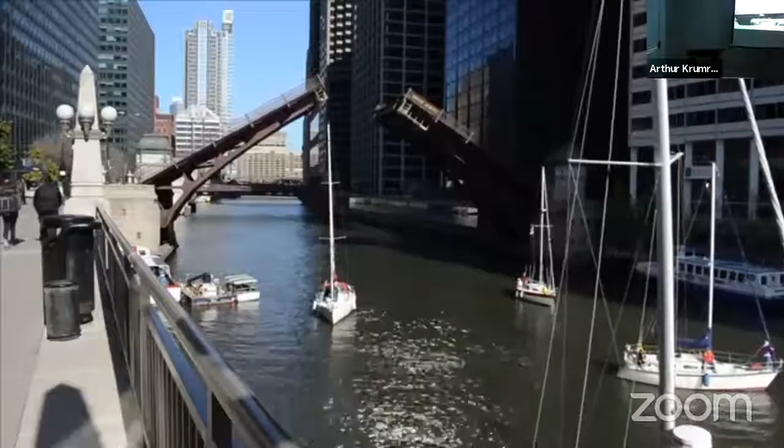Today, Chicago is known for its elevated trains and downtown Loop, Mercantile Exchange and Financial District, the blues, wonderful architecture, cold winters, great food, and sports teams. Knifing through it all is the Chicago River, parsing the busy city into its north, west, and south sides. It is the river that has essentially defined and created Chicago. Besides being the Windy City or Second City, Chicago is also the drawbridge capital of the world. No doubt Amsterdam, Pittsburgh, and Venice have more bridges, but no other city generated as much innovation, and as many different movable bridge designs as Chicago.

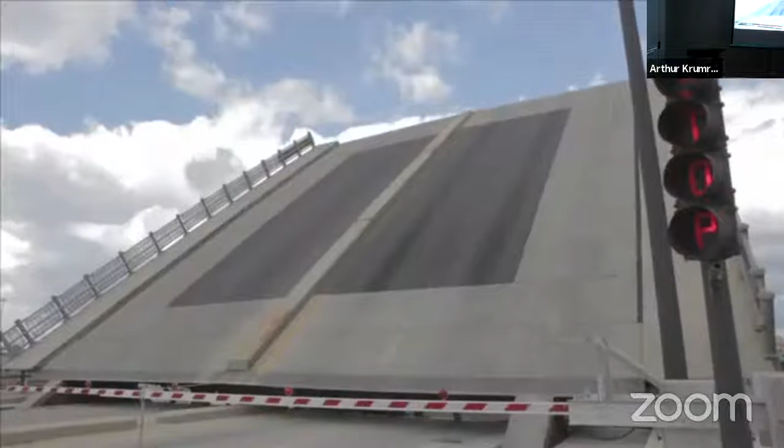My name is Patrick McBriarty, and I used to not care about the bridges. Until one day, a bridge got in my way. Up until about 10 years ago, I was pretty much like everybody else. I didn't think much or give any real consideration to the bridges here in Chicago. They were just there and one way to get from point A to point B. As a kid, we moved around a few times, but then really settled in Youngstown, Ohio. And Youngstown, while I was growing up, was a big steel town.

I was visiting Chicago and met my wife through some friends sailing, and then got married in 1995. Very happily married for about 5 years, and then in November of 1999, she died suddenly, and that completely blows your world apart, and you end up trying to figure out who you are, what do you want to do, and what drives you again. I picked up a camera. I'd done some photography in high school and had enjoyed that, so I ended up going to Kinzie Street and really kind of saw the bridges as more than just simple structures. I mean, there's steel here, there's this gritty aesthetic that kind of drew me in, and now I can't look at a bridge the same way.

When I was first researching the bridges, I found out Chicago was the drawbridge capital of the world, and that just really seemed to hook me, and from there the journey began. Soon after, I found out that today's bridges are called Chicago-type bascules. These bridges were designed by City of Chicago engineers around the turn of the last century. The term bascule is a French word meaning seesaw, suggesting heaviness and balance. The centuries-old bascule principle was commonly used on castle drawbridges.

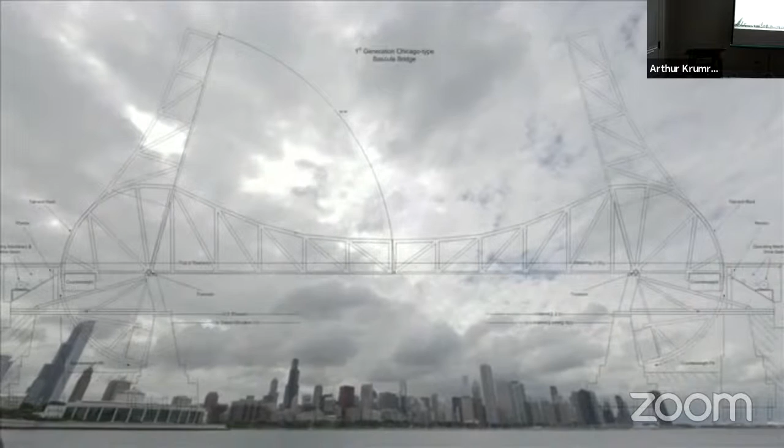Led by city engineer John Ericson, these bridges were developed specifically for the Chicago River. Based on the Tower Bridge in London, the world's most recognized bascule bridge. The Chicago-type drawbridge is also internationally recognized and has been used all over the world.

I had conflicting answers on where the first bridge in Chicago was. And once I dug into that, it revealed a very interesting story about Chicago's earliest beginnings. It was here in 1829 that Archibald Caldwell built the first ferry, and it was just a line strung across the North Branch with a canoe on either side. Locals referred to it as the Grapevine Ferry.

He was running Wentworth's Tavern, which was here on Wolf Point, and competing for the business of the small village and military outpost. Opposite him was his competitor, Samuel Miller, who ran Miller's Tavern. Miller decided to one-up things and built a footbridge on the North Branch just back over here by the Kinzie Street Railroad Bridge that stands up in the air today.

Like a lot of the early Chicago bridges, and this was the very first, here on the North Branch of the Chicago River, it was done in self-interest to generate business, and it influenced the local economy to grow the city of Chicago.

Oh, thanks, Steve. Sure.

Now, building a bridge to get to a tavern makes a lot of sense to me. It'd be a great improvement over trying to climb into a canoe and cross the river, particularly after a few drinks. So whether it's a hot, steamy Chicago day or in the dead of winter, a bridge connecting patrons to a tavern is a great business idea. So here's to Samuel Miller. He built the first in a long line of Chicago River bridges. To Samuel Miller.

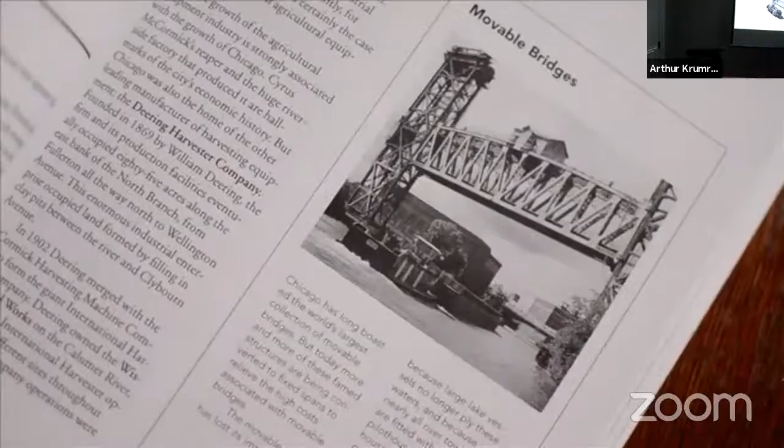While researching the history of Chicago River bridges, a man named David Solzman kept coming up. David is a well-known geographer and professor and author of a book on the Chicago River. Behind the story of these remarkable bridges is the story of a vital river. Hello, I'm David Solzman. I spent quite a bit of time musing about the river and the bridges and all of the other things that go with the river.

I remember being in China. I was on a river cruise to the mouth of the Yangtze. I met a fellow from Japan who was an engineer, and he asked me what I did, and I told him I'd written a book on the Chicago River, and he said, "Is it a big river?" I said, "No, it's very small, 30 some odd miles, depends how you measure it." He said, "Well, why are you so interested? Here's the Yangtze, this great, long, huge river."

And I had to say to him, as I would say to anyone, a lot depends upon where the river is. And this river was a key to understanding the origin and growth of the city here, and for that matter, this whole western expansion, because what happened in Chicago turned the rail network 90 degrees. Traffic and commerce had gone up and down the Mississippi, north and south. But after Chicago got rolling and established a portage on this little river, suddenly the railroads came in and started traffic moving east and west.

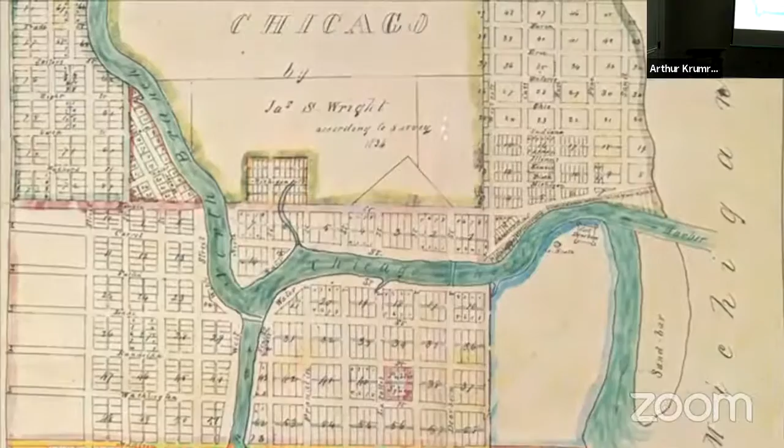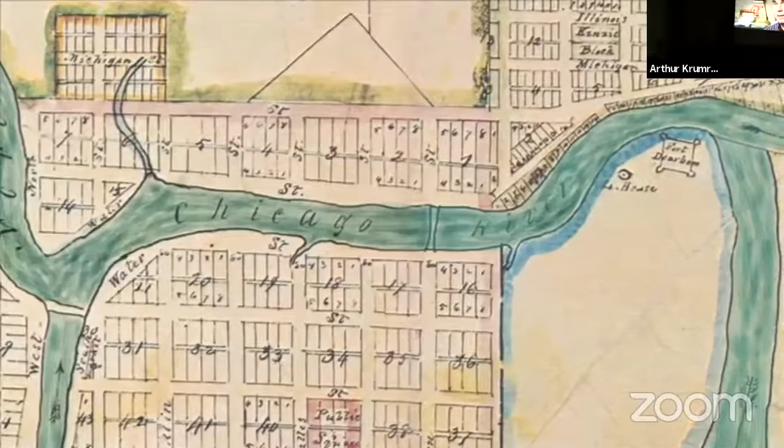So this commercial and political battle between North and South Siders led to an impasse in the Common Council that was finally broken when William Ogden, the city's first mayor, and Walter Newberry, a North Side merchant, donated 2 city blocks to Catholic authorities. And those city blocks are where Holy Name Cathedral stands today. The deadlock was broken and the Common Council voted for the first Clark Street Bridge, which would be the city's 4th bridge and the 2nd drawbridge, and connected the north and south sides of the city.

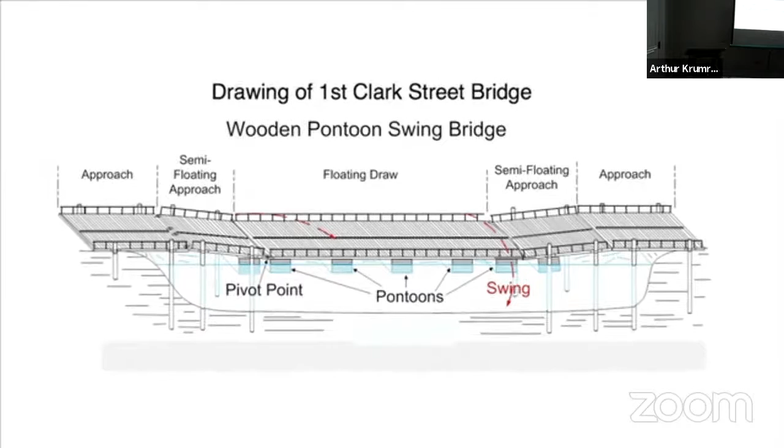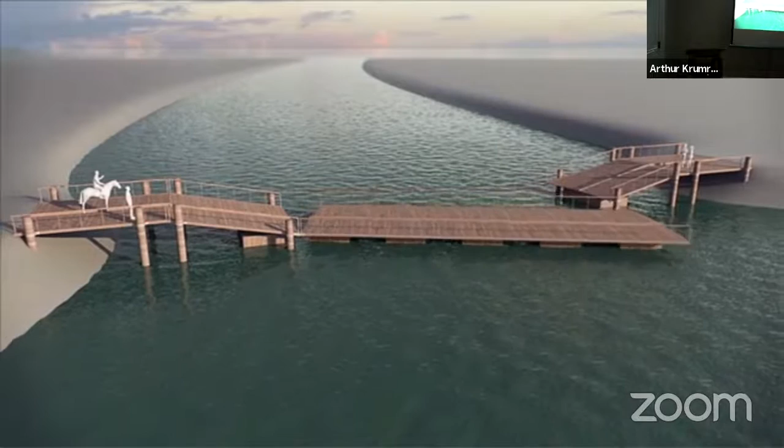One of the things that they try is building a pontoon, just a hollow wooden box, probably sealed with pitch or tar to make it watertight, and floating one end of the bridge on that and having the other end on shore with a pivot so that it can just kind of pull back from across the channel and allow the ship to go past.

Pontoon bridges only last a decade or 15 years in Chicago, but they are still useful in a lot of places in the world where the water is too deep to actually put down piers. And so there are modern pontoon bridges that cross Lake Washington east of Seattle. So the city had built perhaps a dozen of these floating pontoon bridges. And then occurred one of those remarkable disasters that we seem to have in Chicago. We never seem to have any simple disasters.

In the spring of 1849, a rainy spring arrives along with the spring thaw, and a flood starts making its way downriver. Of course, back then, the Chicago River still flowed into Lake Michigan. And so big chunks of ice start getting carried downstream, and they can see the disaster coming. In fact, they can hear it coming because these big chunks of ice are breaking up, sounds like cannon shot in the distance, and the ice is pushing before it the water, which is pushing up the ice, and then

this starts meeting the bridges and carrying the bridges downstream in front of it, and so they can hear it coming. They can sail a few of the boats out into the lake to safety, but there's just not time to get the others.

The Illinois and Michigan Canal opened in 1848. It allowed shipping from the Great Lakes through Chicago to the Mississippi River and the Gulf of Mexico. Soon followed by the development of the railroads, Chicago became a major transportation hub and the nation's transshipment and warehouse center.

Chicago's population grew from 4,000 residents in 1837 to well over 90,000 by 1857. As the young city became a mecca for commerce, more substantial and reliable bridging solutions were needed to support the rapidly growing city.

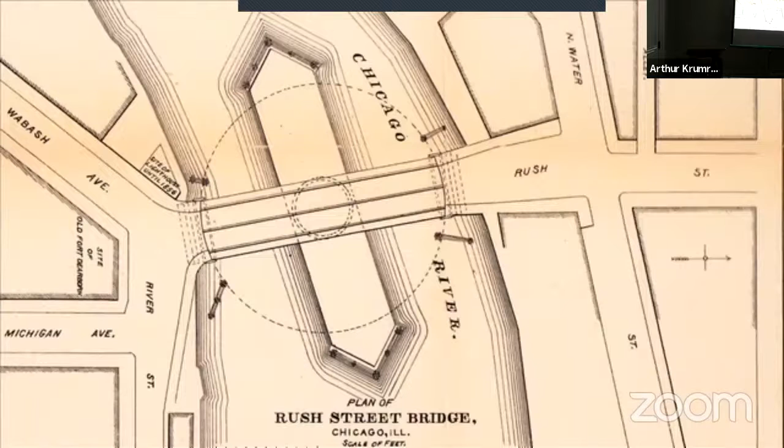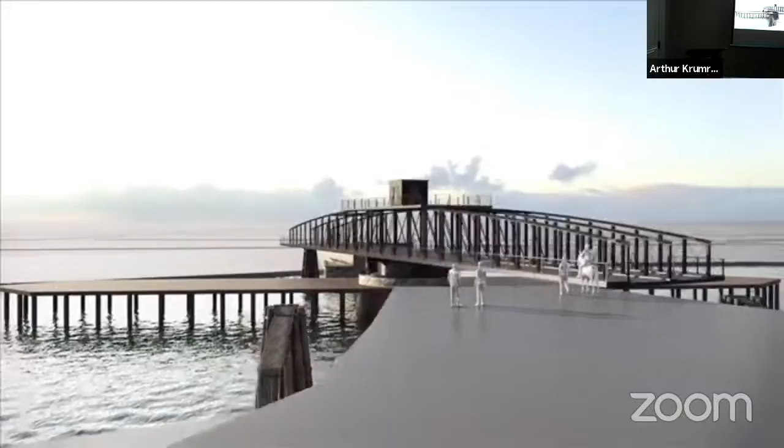The pivot, or swing bridge, was the next movable design tried on the Chicago River. The weight of the bridge was concentrated on the center pivot. These bridges operated like a lazy Susan, as the bridge turntable contained the center pivot and a circle of friction rollers within. This bridge would prove to be the dominant movable bridge solution in Chicago and for the nation over the next 40 years. They required less maintenance than pontoon bridges and permitted passage of small boats underneath.

The bridge tenders typically operated the pivot and swing bridges by placing an angular iron bar, or key, 4 to 6 feet long, into a fitting at the center of the bridge deck. By repeatedly walking the key around in a circle, the reducing gears and turntable rotated the bridge to open and close it. On a hot day, with the busy ship traffic, a bridge tender really earned his money, which in 1858 was $60 to $150 a month, depending on the bridge.

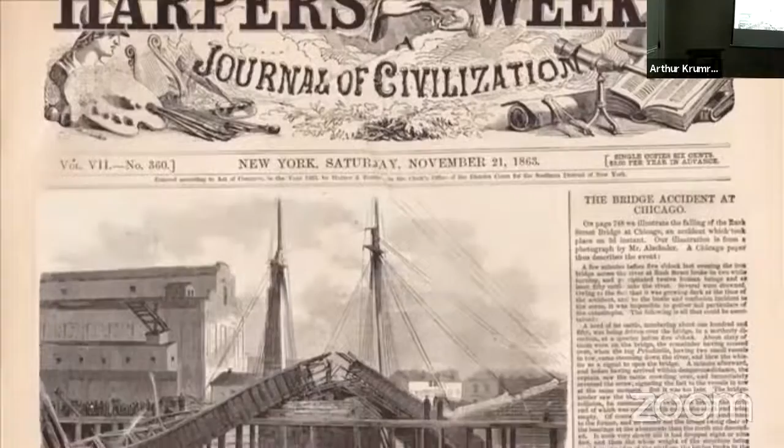For a time, appointed by the mayor, this became a political patronage job, and bridge tenders were bonded against negligence and granted police powers on the bridge and for the immediate vicinity. So one of the most dramatic bridge disasters occurred in 1863. It was at the Rush Street Bridge in November on Election Day, when the main bridge tender was away for the Copperhead Party peddling tickets at the polls.

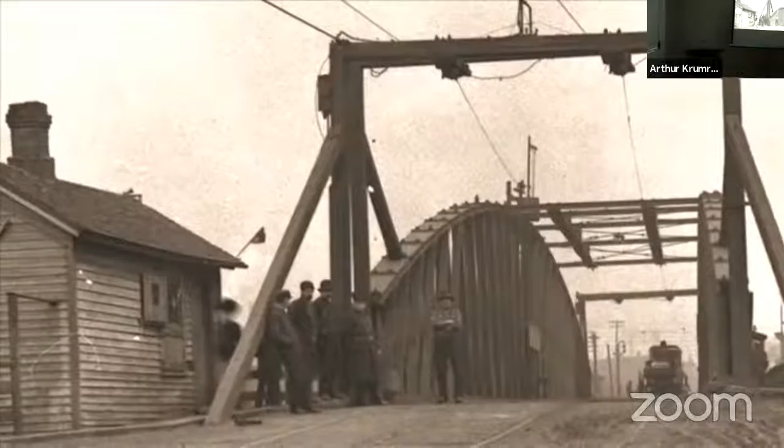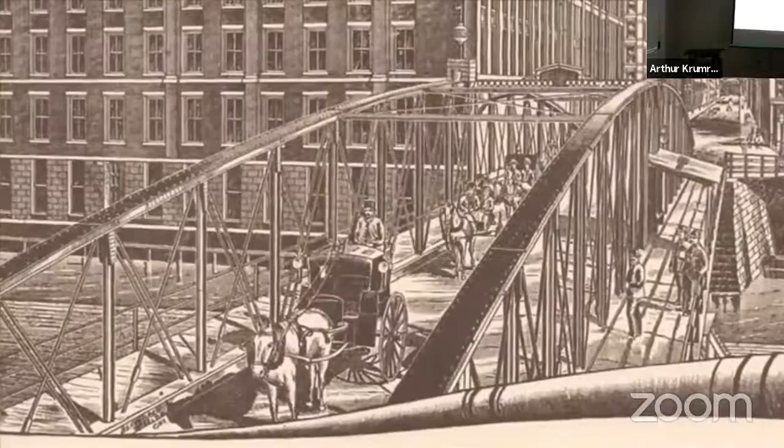He had gotten a substitute, and the substitute bridge tender, which accounts described as an ignorant Irishman, did fine most of the day until about 5 o'clock. There was a herd of cattle being driven across the bridge from the south side to the north side. There was also on board the bridge at that point a buggy and wagon, and there was a woman with 2 children on the bridge and a few other men.

Well, a tug was coming and tooted for the bridges to open. People on board the bridge saw what was going to happen, yelled at the bridge tender not to open the bridge, but he proceeded anyway. He and his assistant started to turn the bridge, and as it turned, there was still about 60 cattle on the north end of the bridge.

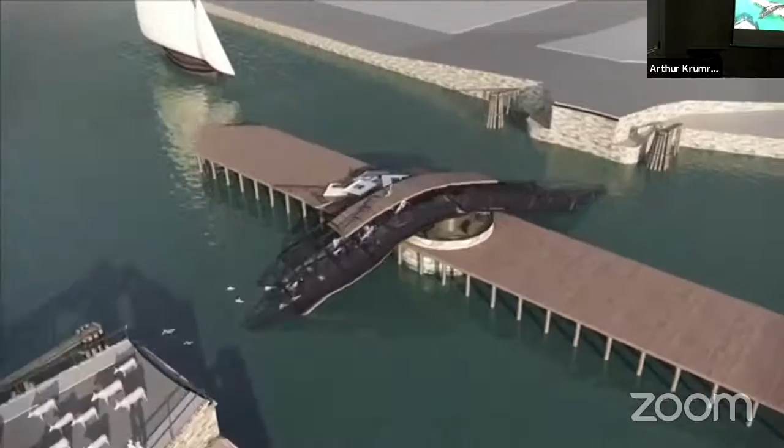And as it rotated away from the abutment where it was resting, then it started to drop slowly as it rotated further into the river. And then suddenly, the south end of the bridge was elevated high up into the air. There were loud reports of cracking of steel and wooden beams as the bridge just collapsed, a total ruin, throwing the cattle and the people and the wagons into the river to swim for their lives.

The disaster was so great, the Copperhead mayor, Mayor Sherman, had a new contract for another Rush Street Bridge out within 2 weeks, and 4 months later, a completely new bridge was built and opened to traffic. The robust swing bridge design offered greater stability and construction of longer, wider, and heavier spans. Better bridges were demanded to convey the ever greater traffic of the rapidly changing city as it doubled and tripled in size. And yet, another Chicago disaster was just around the corner.

So everybody knows about the Great Chicago Fire. And what I wanted to know was, how did that affect the bridges? Basically, a fire raged through Chicago. Most of the city center was burned up between October 8th and October 10th in 1871. The fire raged for over 3 days, with acres and acres of destruction and over 100,000 people left homeless.

And at that time, too, Chicago was mostly made of wooden structures, while the bridges were also mostly wood, even while iron was becoming more and more available. The fire then destroyed 8 bridges right in the heart of downtown Chicago.

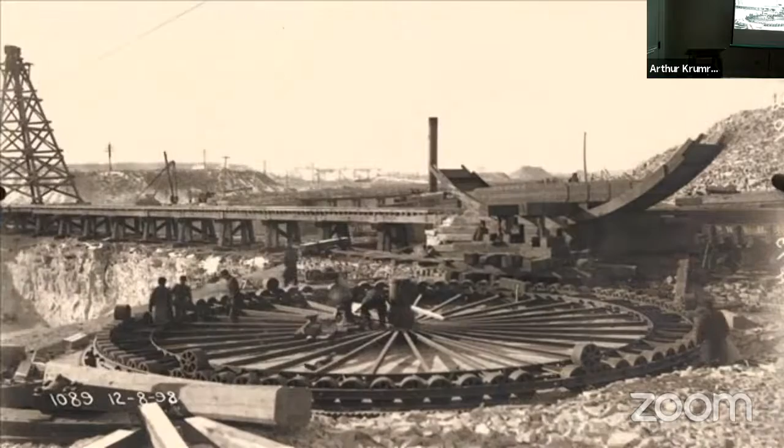Rising from the ashes, Chicago rebuilt and became the busiest port in the world during the 1880s. At its peak in 1887, the Chicago River saw over 21,000 ship arrivals and departures, fueling Chicago's growing industry. The increasing availability of steel brought about larger ships. As a result, no other city in the world experimented with as many different movable, and in particular, bascule bridges as Chicago did between 1890 and 1910.

Prompted by the city's continued development and need to improve national waterways, a new design was demanded to replace the swing bridges, particularly on the Chicago River. The new, bigger steel ships forced removal of the swing bridge center piers, which made navigating important sections of the Chicago River difficult or impossible.

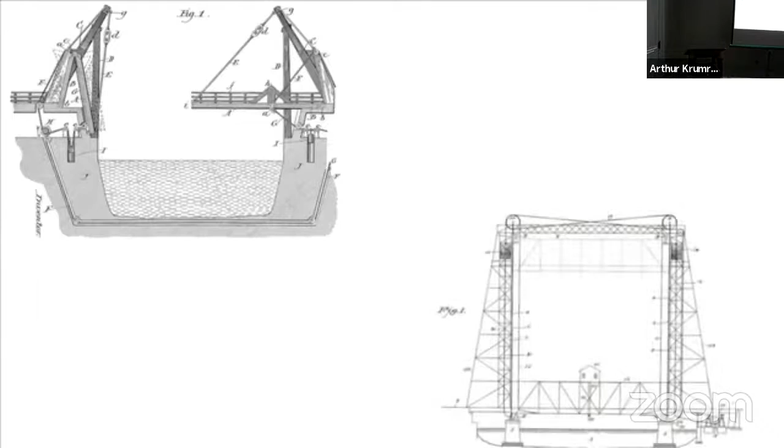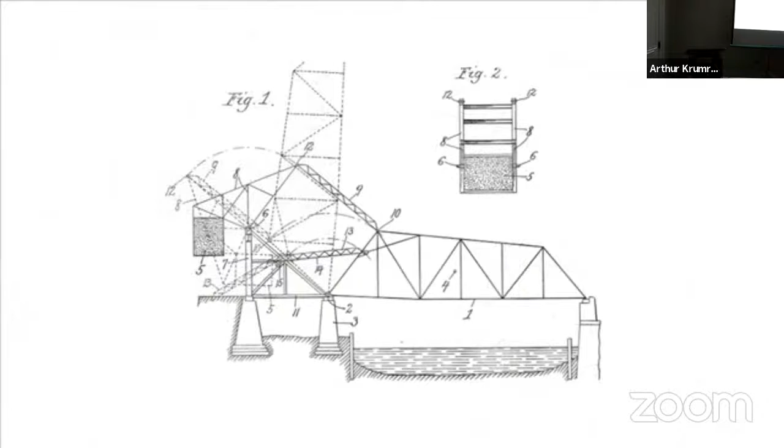With no clear bridging solution, inventors, engineers, and entrepreneurs rushed to solve this emerging infrastructure problem. However, the shortcomings of private sector bridge attempts would eventually push City of Chicago engineers to create their own drawbridge design. Inventors and engineers saw an opportunity to design the next bridge to replace the swing bridge.

The very first experiment the city tried was what was called the folding lift. And this was invented by William Harmon, and it was also called the Harmon Jackknife Bridge. The design was a little too complicated, had too many moving parts, and the city looked for another solution.

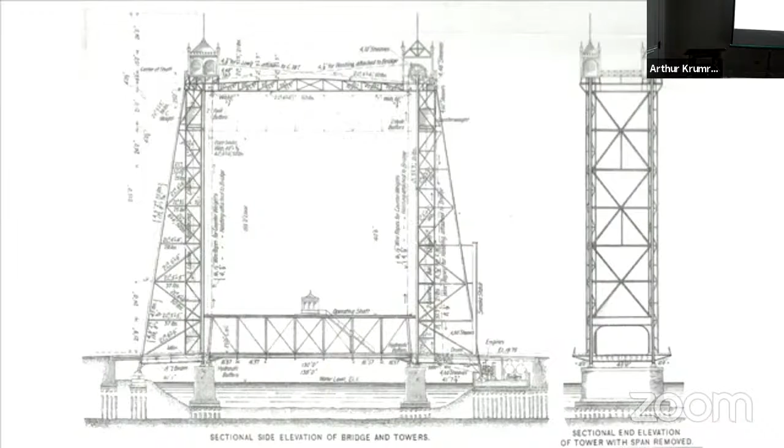The next solution was a vertical lift bridge. This was a bridge designed by J.A.L. Waddell, a Kansas City engineer. And Chicago built the first of its kind in the world at South Halsted Street in 1893. It featured massive steel towers on each riverbank that were connected by the bridge roadway. The bridge worked basically like an elevator, so it was pretty straightforward, but it was somewhat expensive to build and was quickly surpassed by yet another design the city tried.

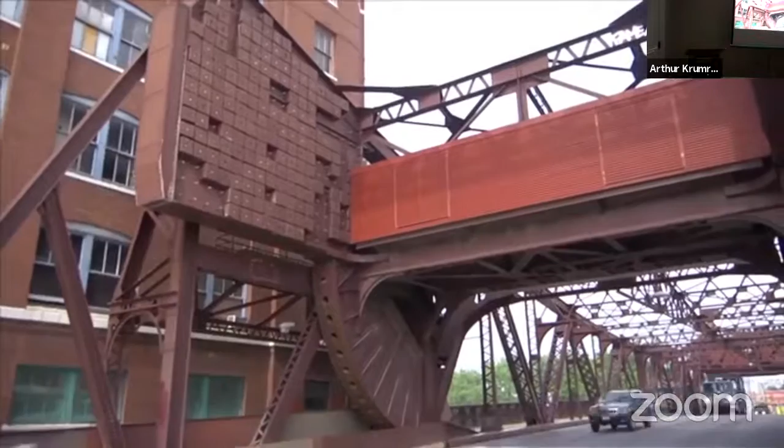Behind me is the Scherzer Rolling Lift Bridge at Cermak Road. Formerly called 22nd Street, this bridge was built by the Sanitary District in 1906. These bridges worked by rolling up and back, very much like a rocking chair.

The only problem with this bridge was the fact that after a couple of years, these segmental steel girders would deteriorate because when they opened and closed, the shifting wind pressures would cause the bridge itself to wag. That wag would also cause the foundation of these bridges to walk towards the center of the river as much as an inch or two each year. Then when the two leaves would come together, they might overlap or bang up against each other and not allow the bridge to close completely.

It was because of these faults in this design that the city of Chicago eventually would go ahead and build its own Chicago-type bascule bridge and come up with the ultimate solution for the Chicago River.

We're here in the Bridge House Museum with Jim Phillips. And Jim is a retired engineer and also volunteers on occasion here at the Bridge House Museum. Jim, tell us a little bit about the history and the Chicago bridges.

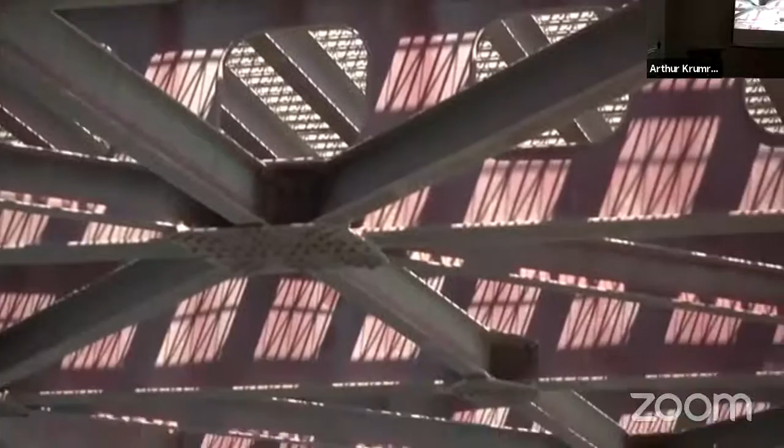One of the things that I find interesting about the bridges in Chicago is that the concept of the bascule bridge is something that dates back to the Egyptians. The actual implementation of the concept that was actually worth something to civilization had to wait for the development of material science to come into being. Right, because they didn't have the steel or that in Egyptian times. Exactly. And so they could do it on a small scale, but when you needed to cross a larger body of water, then you had to do something else.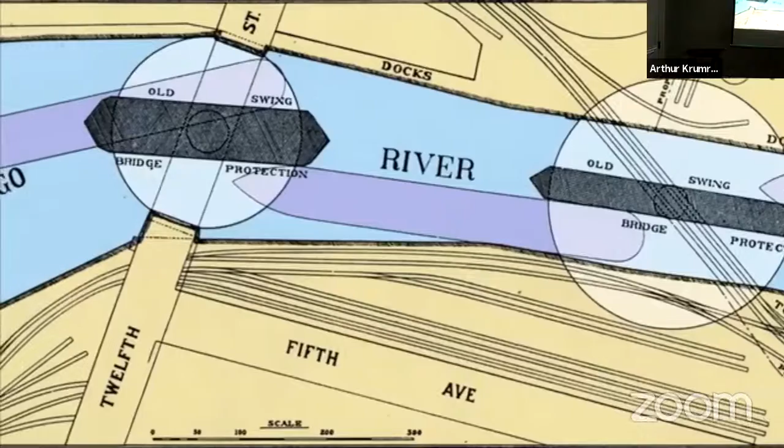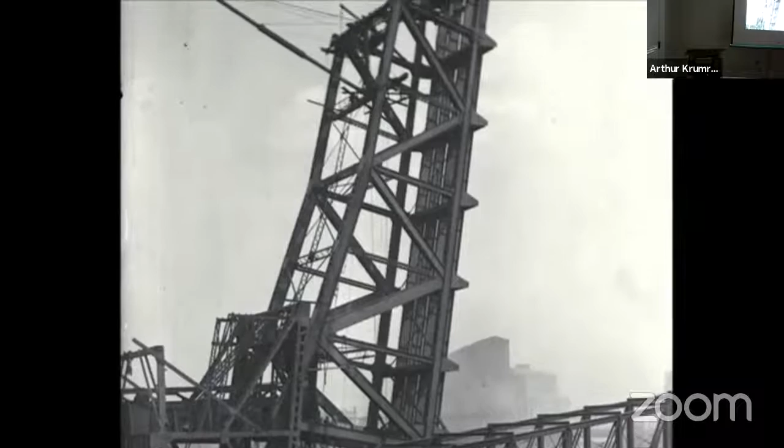Right. So the first bascule, or one of the most notable bascules, was built in St. Petersburg, Russia. And then up around in the 1890s, the bridge that was actually used as the model for the Chicago bridges, the Tower of London Bridge, was built. There was a lot of pressure from the U.S. government for the engineers to replace the swing bridges in the river, because they were taking up too much real estate in the river. They needed some more space to handle the larger vessels. And so you had the engineers looking for some sort of a vertical way to open up the bridges. And so that was the perfect opening for the bascule.

Right. And there seemed to be a little friction between Scherzer and John Ericson at the time, who was the city engineer. And so you've had all of these things kind of come together, and it turns out the bascule works because it has the simple machinery, it's a robust design, and there is no patent on it. Ah, right, because it's so ancient. Yeah.

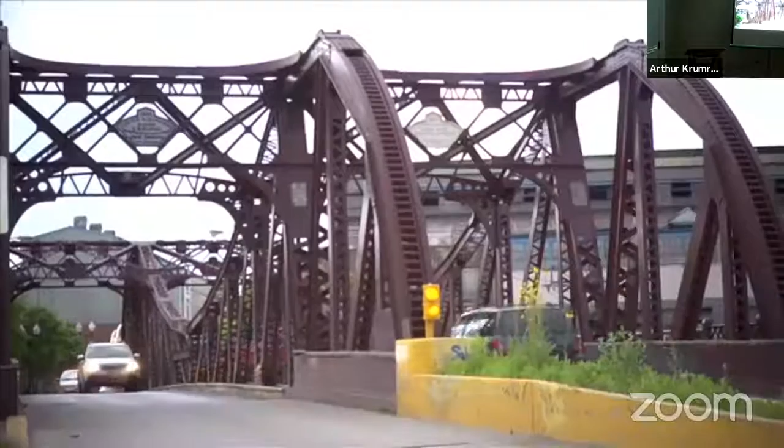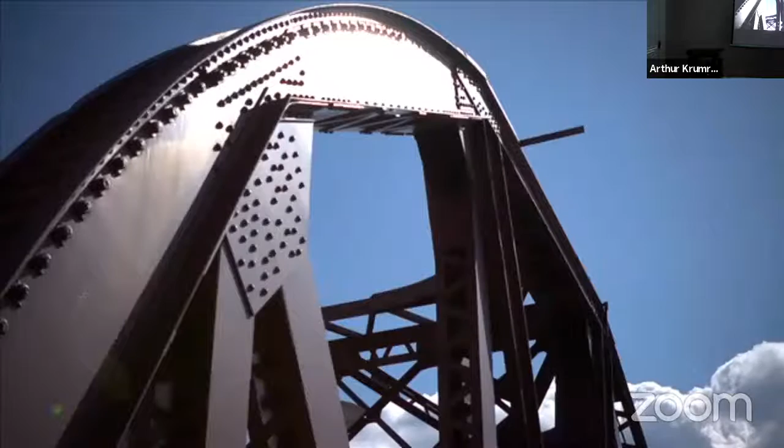We're here at Clybourn Place, later renamed Cortland Street. And this bridge is the very first Chicago-type bascule bridge. This is the first of a series of bridges of the Chicago type built between 1902 and 1911. These first-generation bridges are identified by their signature high curve tail ends and 3 truss superstructures. A rack on the ends of the 3 trusses meshes with a pinion or drive gear just below the roadway. Engaging the rack, the tail end of the bridge is driven down to raise the bridge and open it.

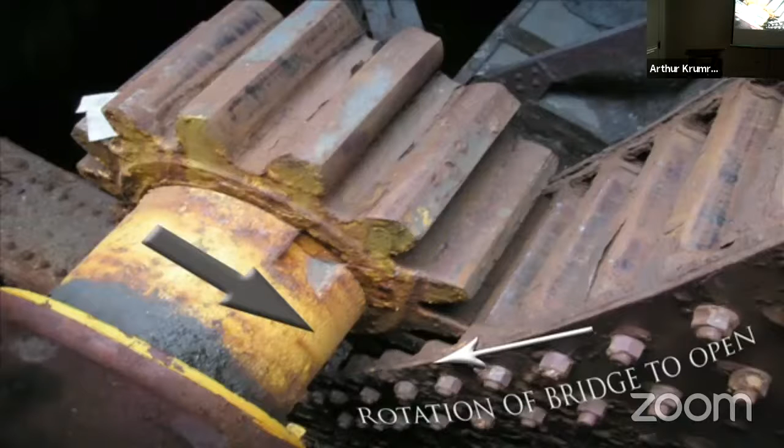They really operate on the same principle as does a teeter-totter. You have your horizontal surface that's balanced with a concrete weight on one end, and it pivots on an axle or a trunnion, similar to a teeter-totter. So even though the bridges look heavy and imposing, they're really delicately balanced. In fact, most of the bridges use motors of comparatively small horsepower. You'll find 100 to 110 horsepower motors that are moving hundreds of tons of metal and steel because they're so delicately balanced.

I don't think a lot of people would refer to several hundred tons of steel and concrete as graceful, but I really think the bridges are graceful. Anyone who's seen them in operation really stops and pauses to look at all of that steel and concrete moving so slowly and so smoothly up, and then seeing the skyline in the background. It's really a sight that truly is unique to Chicago.

The Michigan Avenue Bridge is arguably the city's most famous bridge, known throughout the world. It celebrated its 90th birthday in 2010, and that bridge really operates as well as it did when it opened in May of 1920. Granted landmark status in July of 1991, the Michigan Avenue Bridge is the pinnacle of innovation for the Chicago-type bascule bridge. These are the bridges that were designed by city engineers around the turn of the century to become the ultimate bridging solution for the Chicago waterways.

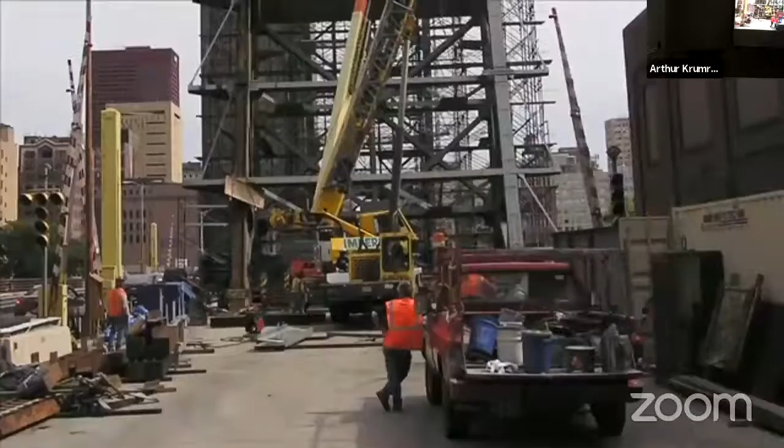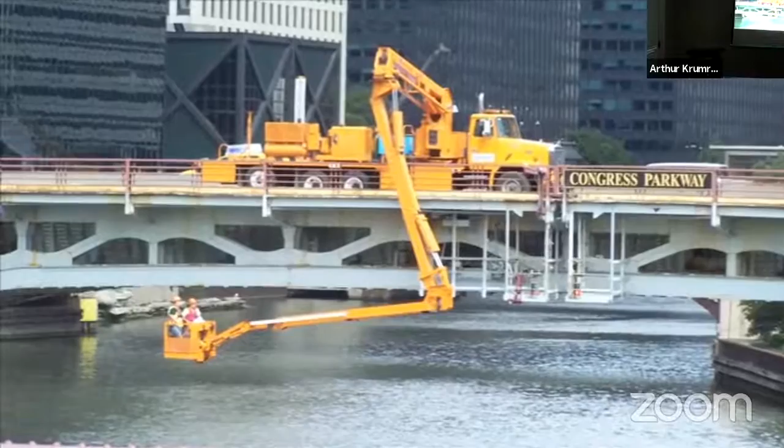We have an aggressive program to rebuild and refurbish the bridges. Just over the last 10 or 15 years, we've completely rebuilt the Franklin Orleans Bridge and the Wabash Bridge. Other bridges have received significant makeovers, such as the Michigan Avenue Bridge and the LaSalle Street Bridge. We have a regular program to paint the bridges, which sounds like a simple undertaking, but really the painting of the bridges has to be done with consideration of the delicate balance of the trunnion bascule bridges.

Whenever you repaint a bridge, you're adding several hundred pounds of paint to it. So every time we paint a bridge, we have to recalibrate the counterweights that allow the quick and efficient lifting of the bridges. We do that every time we do maintenance to a bridge or every time we paint a bridge. The balance is so delicate that even something as seemingly innocuous as painting it can really put the bridge out of whack. So we have a regular program for maintenance and upkeep.

These bridges have operated in some cases close to 100 years in downtown Chicago. We anticipate them operating for another century or more. As an example of the City of Chicago's commitment to the bridges, in 2013, the 90-year-old Wells Street Bridge was completely rehabilitated. With approximately 78,000 commuters crossing this bridge every weekday, uninterrupted elevated train service was critical.

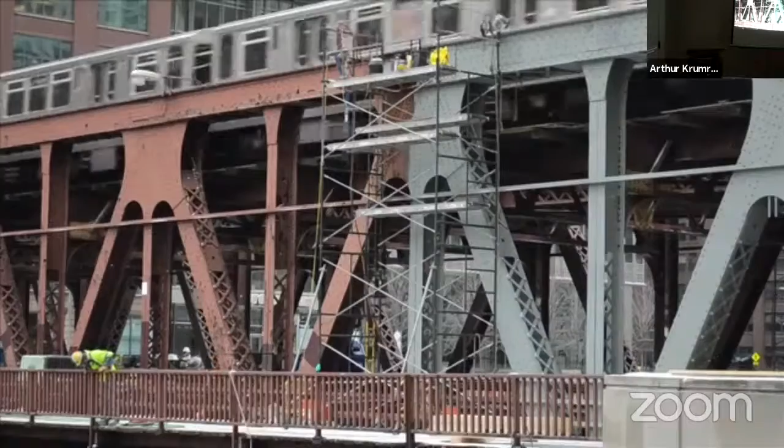Beginning in November 2012, the lower level of the bridge was closed to street traffic. And using barges and tarps to contain the dust, the approach structures of each leaf were sandblasted, reinforced, and a primer coat of paint applied. Yet the most amazing part of this undertaking was replacement of the truss superstructures over the river.

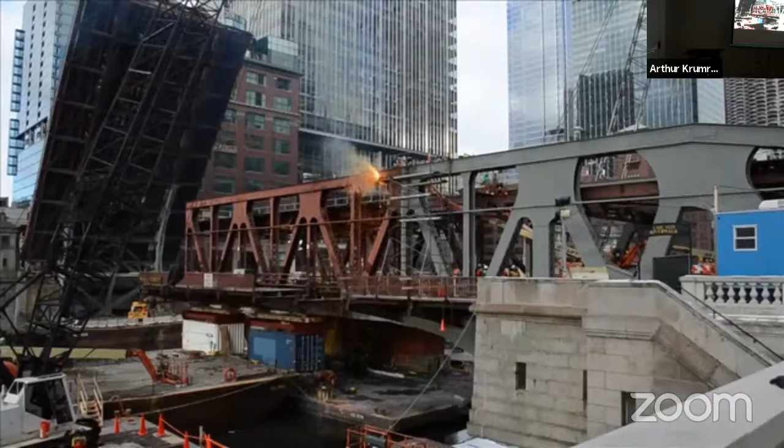The contractor built a portion of the bridge at an off-site location, and then over the course of 2 weekends, we barged in the new truss, and then we staged it on the side of the bridge. And then with as short as possible a 9-day closure, the crews working around the clock cut the old truss and reconnected the new truss, something the city has never done. So this was probably the most complex thing we've ever done in the city as far as a public works project.

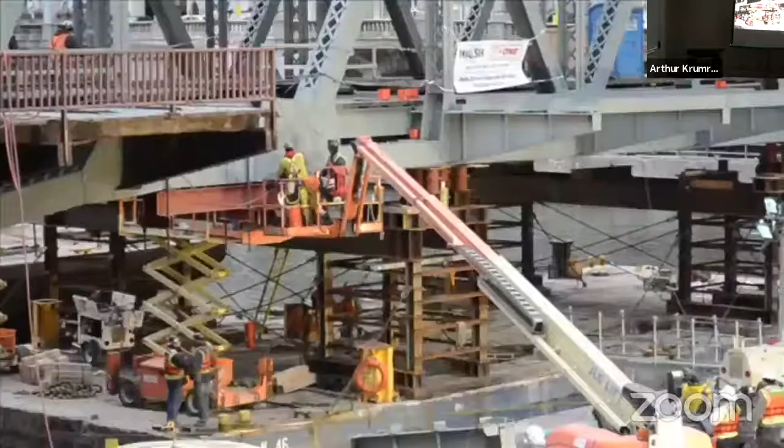Amazingly, each of these 500,000-pound truss superstructures was rotated into position by tug, then aligned, leveled, and slowly winched into place. Watching these huge structures get moved into place and so precisely aligned to match up the pattern and myriad of bolt holes for an exact fit was just mind-boggling. It is a testament to the impressive level of planning, coordination, and engineering savvy of everyone involved.

The bridges are historic, and so whenever we do reconstruction of a bridge, we don't upgrade the look of the bridge. We keep the same historic look. When we're done with it, you won't be able to see a difference because we're building it with exactly the same style of architecture as before. And to actually work on bridges like this, it's an awesome, awe-inspiring experience. We love these bridges. They're our pride and joy.

Hollywood has showcased Chicago and its bridges in countless films since the birth of cinema. From simple establishing shots to spectacular stunts, the bridges have played important roles. Let's face it, it is the American city. This is, in my humble opinion, the most cinematic city in the country. I would say the bridges in Chicago are one major location that directors love. It's difficult to think of a film shot in Chicago that doesn't make use of the bridges.

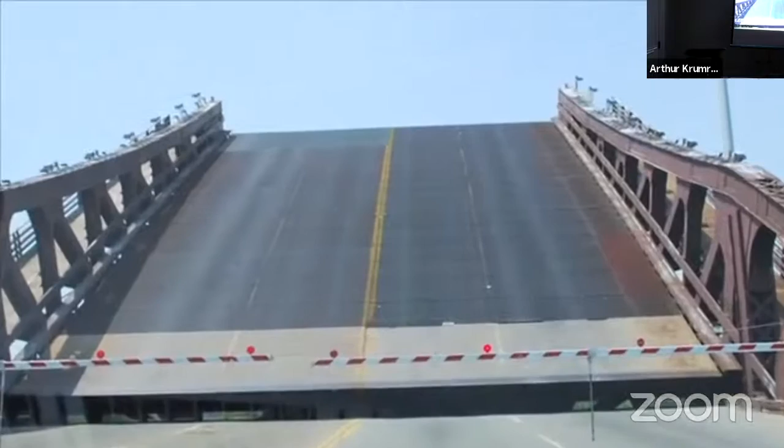One of the most iconic bridge jumps in films set in Chicago is in John Landis's The Blues Brothers from 1980. Dan Aykroyd jumps the East 95th Street Bridge over the Calumet River to demonstrate to John Belushi's character that the repurposed police car he has adopted as a new Bluesmobile is in fact worthy of the function. And when there is a pursuit, when there is a ticking time clock of some peril, it seems that the bridge will always be opening at that time, leading to bridge jumps that would otherwise not be necessary.

In 2010, Transformers shot several special effects scenes involving the bridges. CDOT was involved early in the process. The special effects company reached out to us along with the production company, and they told us that they wanted to involve the city of Chicago, our bridges, in many stunts. And the main event stunt was at the Michigan Avenue Bridge.

And the type of stunt they wanted was the bridge leaves open. Some of the cars are stuck on the bridge. Some of them come crashing down, sliding down. There's this large sequence of events where one of the cars is teetering off the end of the bridge, and all these sorts of explosions and things like that. So the first thing we did was we met with the production company and the special effects company and their structural engineer to tell them how we want to connect these cars that would eventually slide or stay stationary as the bridge leaves open.

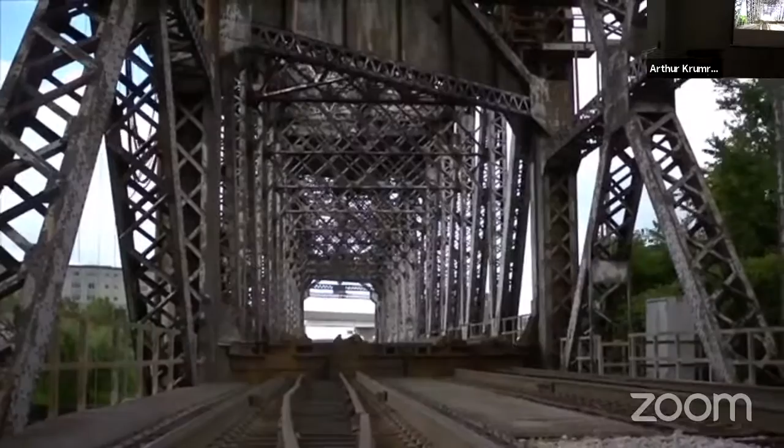So with all these amazing bridges in Chicago, which one is my favorite? Hands down, it's gotta be Kinzie Street. That's where it all began, for me on my journey and for Chicago. So if I have to choose my favorite of all the bridges, at least in downtown Chicago, I think it has to be the Amtrak Bridge, the one built in 1915 for the Pennsylvania Railroad. And I just love feeling the bank shake as it comes back down.

My favorite bridge is the Roosevelt Road Bridge. I grew up on the south side of Chicago, and I went to high school at St. Ignatius on Roosevelt Road. So every morning when I took the bus and I crossed that bridge, it was like I was crossing into a whole nother world.

My favorite bridge is the Lake Shore Drive Bridge. I like it a lot because it has 4 towers. There's another dimension to it with the 2 levels. That is probably the heaviest bridge in the city of Chicago. When you run the locks, it sounds like there's a beast in there. You could hear, "Arr."

The bridge that has long been my favorite is the LaSalle Street Bridge, built in the late 1920s. Its architectural features, its huge and imposing trusses, how it is really at the start of the LaSalle Street corridor when you're on the north looking to the south. My favorite bridge is the Michigan Avenue Bridge. Shooting this documentary, it's just amazing to me to see that it's actually two bridges, and when it rose, it just had this epic feel to it.

Of course, the great double-decker Michigan Avenue Bridge is an icon of the city and a mechanical marvel. Personally, I love it because it reminds me of when I was a child. I used to meet my dad for lunch, and I'd have to cross the bridge to go meet him in his building. Once you cross the bridge, you see all the shops, and it just really brings together the feel of Chicago.